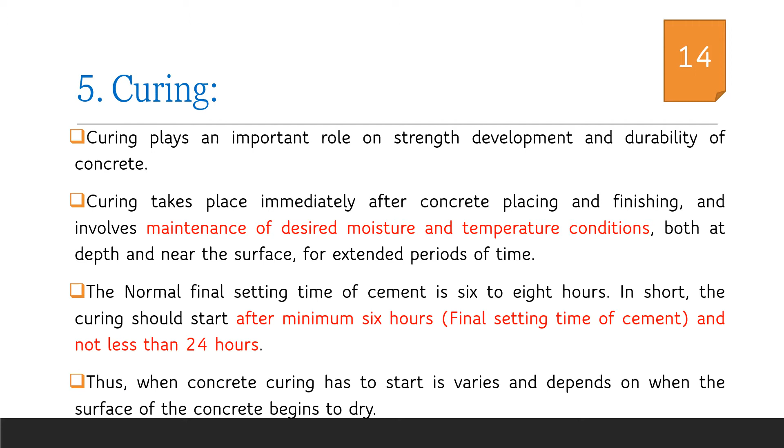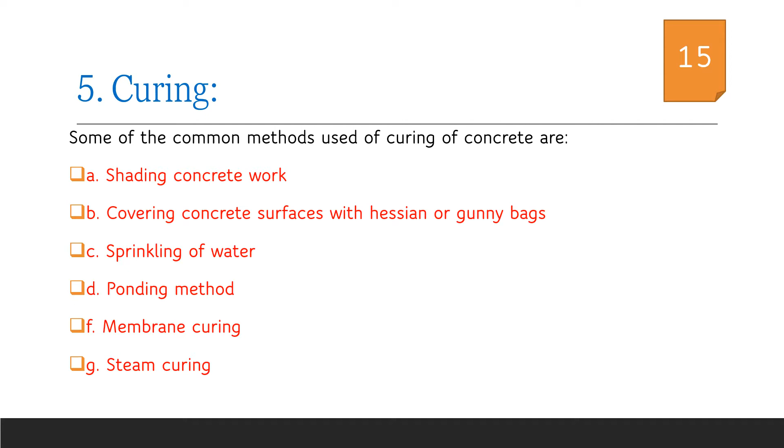Depending upon the type of construction, various different types of curing methods are available. Some of them are shading of concrete, covering of concrete with gunny bags, sprinkling of water, ponding method, membrane curing, and steam curing. Shading of concrete work can be adopted for small concreting.

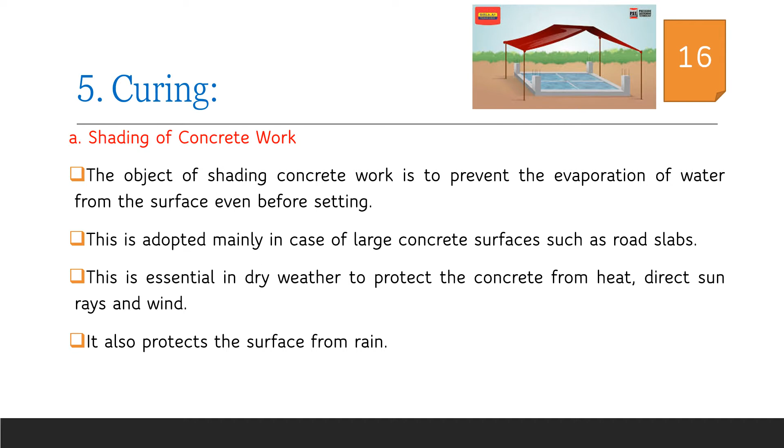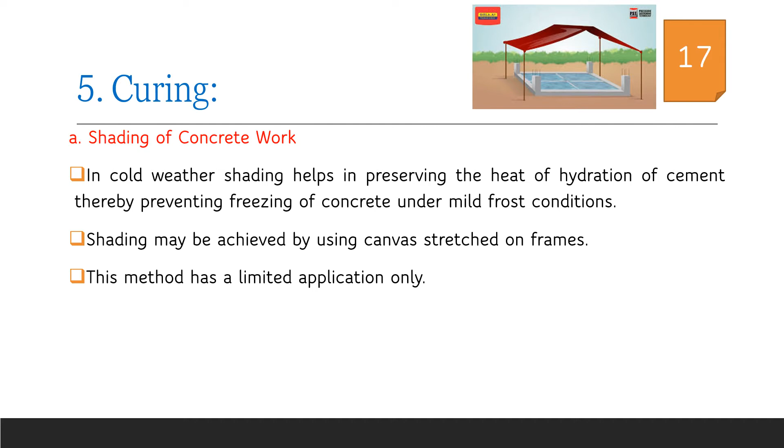As you can see in the picture, the area concreted is shaded using tarpaulin or something similar. As a result, the area can be protected from sun as well as rain. This method is suitable for cold weather concreting also, for preventing freezing of concrete under frost conditions. However, this method has only limited applications.

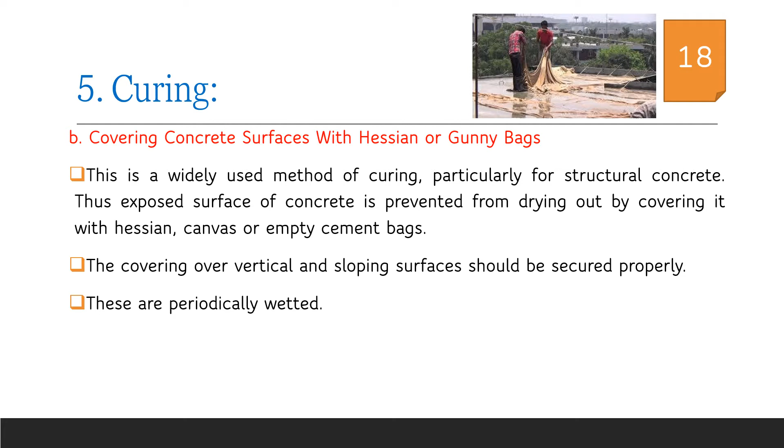Covering of concrete surfaces with gunny bags is one of the most commonly used methods of curing. In this method, gunny bags are properly wetted and used to cover the concreted surface. Depending upon the atmospheric conditions, the gunny bags are to be wetted periodically such that moisture content is always maintained in the gunny bags. Special arrangements have to be made to wet the gunny bags during nights as well as during holidays.

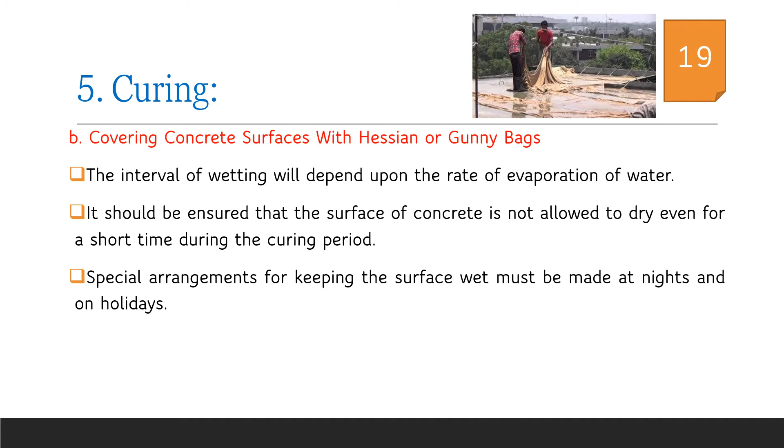Sprinkling of water over the concrete surface is one of the easiest methods of curing. The concrete should be allowed to set sufficiently before sprinkling is started. The spray can also be obtained from a perforated plastic box. Such perforated plastic boxes filled with water can be placed at regular intervals over the concrete surface. The intermittent refilling of these plastic bottles will keep the concrete surface wet for a longer time.

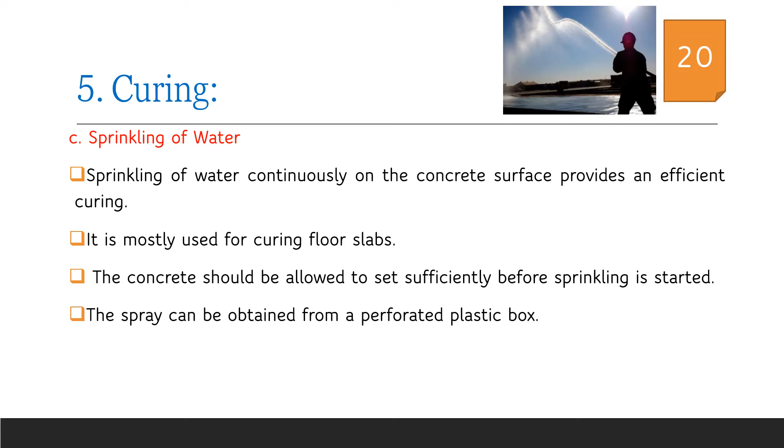Sprinkling of water is suitable for slab-like structures. It is not suitable for vertical and sloping surfaces, because in such cases we have to do the sprinkling at regular intervals and for a longer duration of time, and it will be wasting a lot of water also.

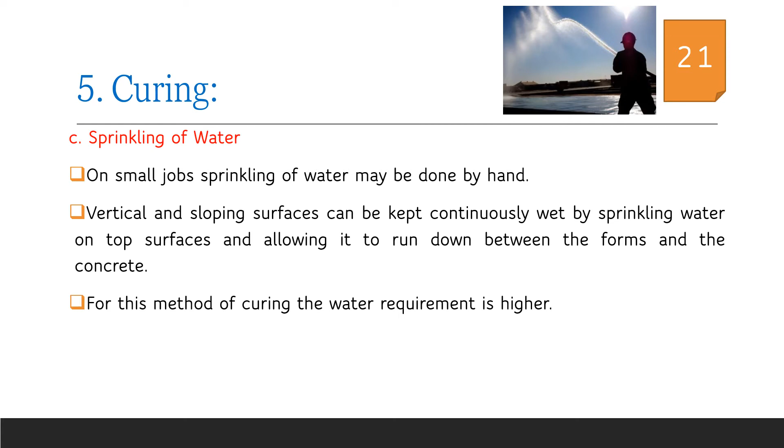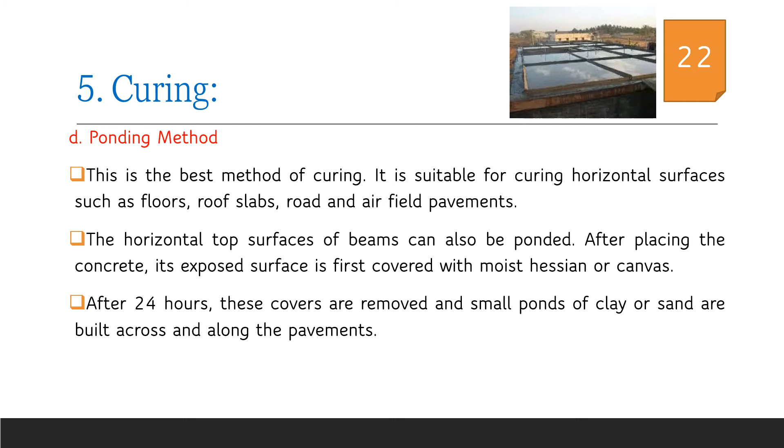Ponding method of curing is most suitable for horizontal surfaces such as floors, roof slabs, roads, and also on top of beams. It is generally preferred after 24 hours of concreting; before that, we use wetted gunny bags. After 24 hours of concreting, we can make ponds using clay or sand and fill these ponds with water. This will ensure a longer time of curing of concrete surfaces. Ponding can be adopted for large horizontal areas.

It is always better to divide the area into small rectangles and fill the ponds with water. This will keep the surface wet for a longer duration of time. But it is found that after curing, it is difficult to clean the clay that is used to create the boundaries of the ponds.

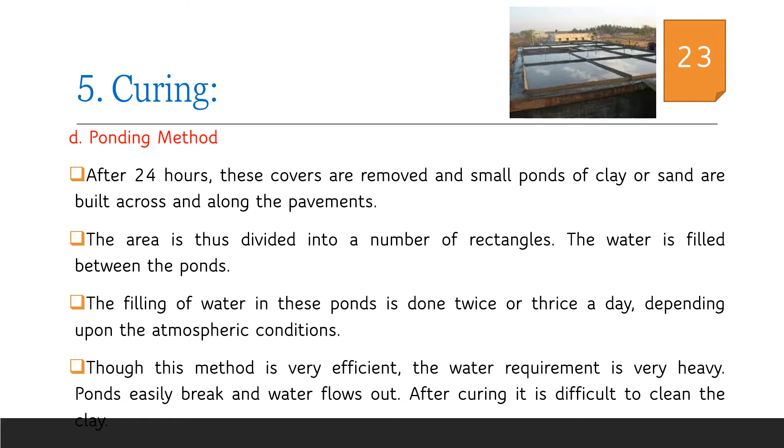Membrane curing is most suitable for vertical members. As we have seen in previous methods, it is difficult to cure vertical members. In that case, we have to cover the vertical members using suitable membranes such as gunny bags, wetted intermittently so that the member is always moisturized and water is not allowed to escape from the member. This method of curing is termed membrane curing.

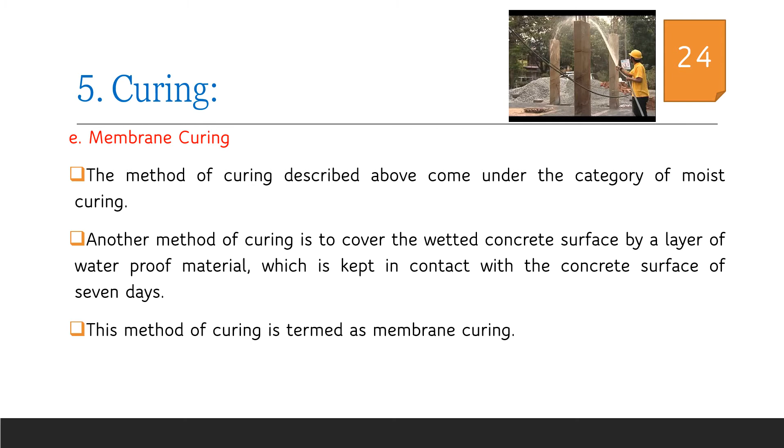Membrane curing can also use membranes which do not allow the water present inside the concrete to escape to the external atmosphere. The membrane can be either solid or liquid. For example, bituminized waterproof papers, wax emulsions, bitumen emulsions, and plastic films are common types used. The main purpose of this membrane is to prevent water from escaping from the concrete.

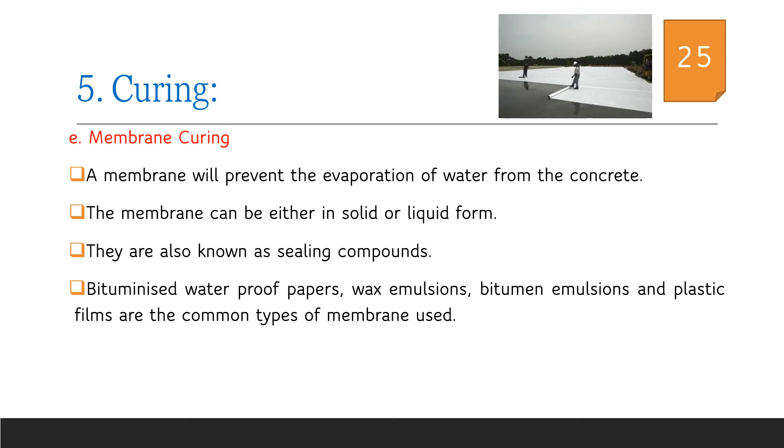Membrane curing is adopted after initial curing using wet gunny bags. After 24 hours of curing with wet gunny bags, we can place a suitable membrane to prevent the escape of water available inside the concrete. This method of curing does not need constant supervision.

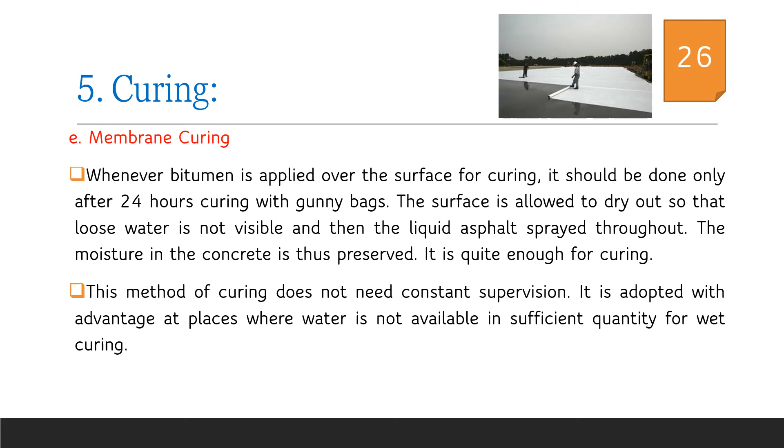It is adopted with an advantage at places where water is scarce, since frequent supervision is not required. But due to the lack of supervision, there is a possibility that the membrane gets damaged, causing evaporation of water from the concrete beneath it, which will negatively influence the strength of the concrete.

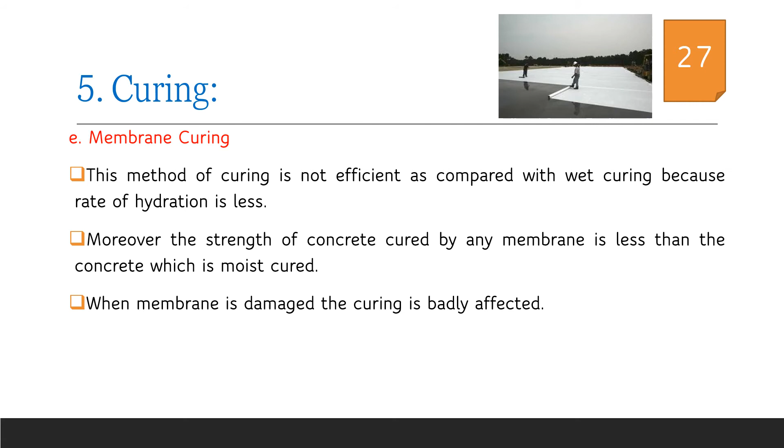Steam curing and hot water curing are the latest methods of curing. In these methods, strength development in concrete is found to be rapid. These methods are best suited for precast concrete works since they require a set of arrangements, and such conditions must be maintained for proper curing results.

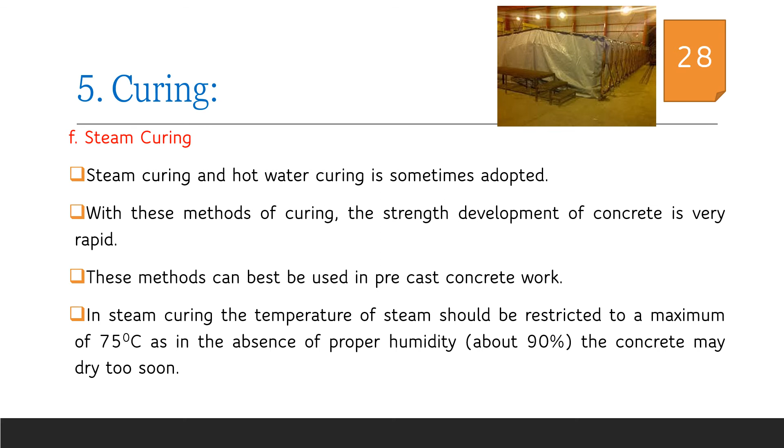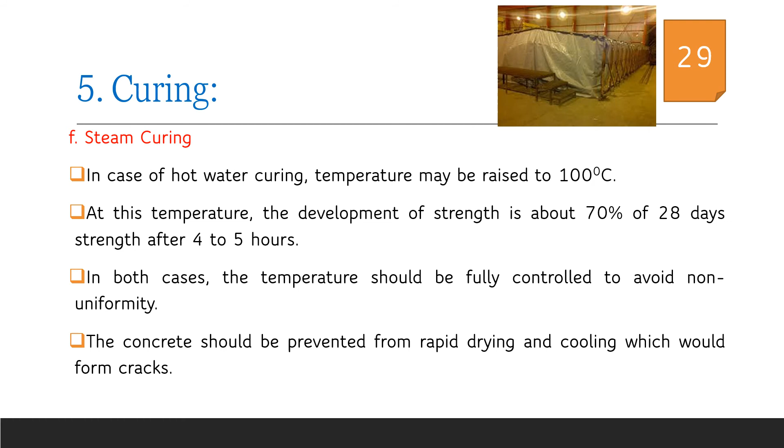In steam curing, the temperature of steam should be restricted to a maximum of 75 degrees Celsius with 90% humidity. In hot water curing, the temperature may rise up to 100 degrees Celsius. In both methods, 70% of 28-day strength is obtained within 4 to 5 hours. The temperature should be fully controlled to avoid non-uniformity, and precautions should be taken to prevent rapid drying and cooling of concrete, which may cause crack formation.

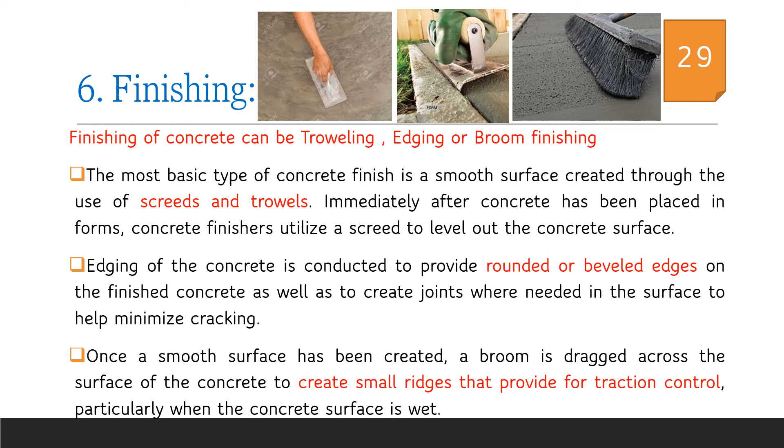Finishing is done immediately after compaction and before curing starts. There are different methods of finishing such as troweling, edging, and broom finishing. Troweling, shown in the picture, uses a trowel to finish the surface of concrete in a polished manner. Edging is used to finish the edges of concrete work. Brooming uses a broom to create a rough surface in order to avoid skidding on the concrete surface. Finishing can also be done through texturing, coloring, and polishing.

Colored concrete can be prepared by mixing colors into the concrete during mixing of ingredients, or by placing coloring powder on top of the finished concrete and finishing it properly to get coloring on the top surface alone. Nowadays, machines are available to prepare polished surfaces of concrete that appear similar to marble finishes.

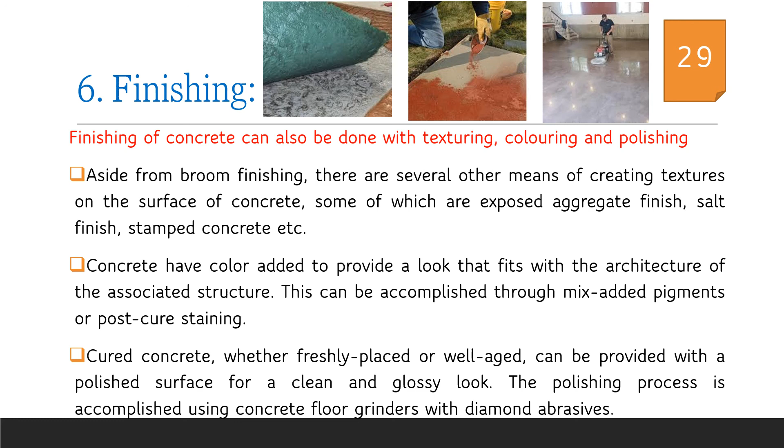So we have discussed the procedure of concreting in detail, which involves batching, mixing, transporting and placing, compacting, curing, and finishing. Thank you.